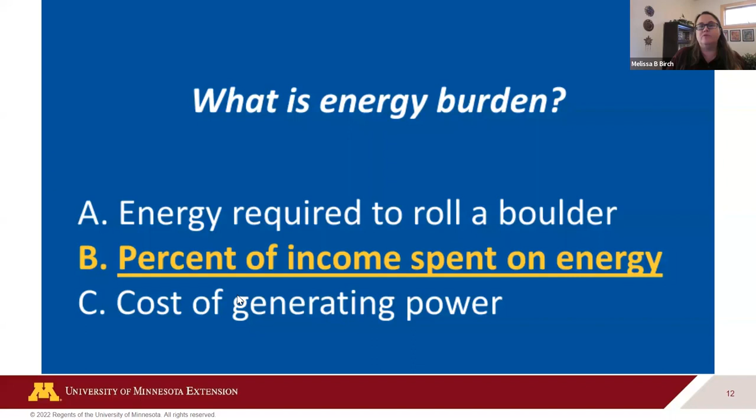I'm seeing lots and lots of B, and that is excellent because it is, in fact, the percent of household income that is spent on home energy bills. So the nation's average energy burden is about 3.5%. Minnesota's is about similar to that, but that's an average, right? For many Minnesota households, they may be spending 20 or 30% of their income on energy.

So we have at CERTs what we're calling the Under 5% campaign. The idea behind that is to reduce all Minnesota families' energy burden to under 5% of their income. And so that's where we get into those partnerships and working with communities to reduce energy burden. So there are a number of ways that we think about this.

One is getting assistance. So if you're someone who's like, gosh, my energy bills are just really more than I can handle right now, we're going to talk a little bit about some of the programs that are available to help deal with that. Or you may be thinking, how can I make my home more efficient, or work with my neighbors to help make their homes more efficient? We're going to dig into that in depth. And then at the end, we will talk a little bit about some of the tools and resources that we have available if you want to partner with us or work to end energy burden in your communities.

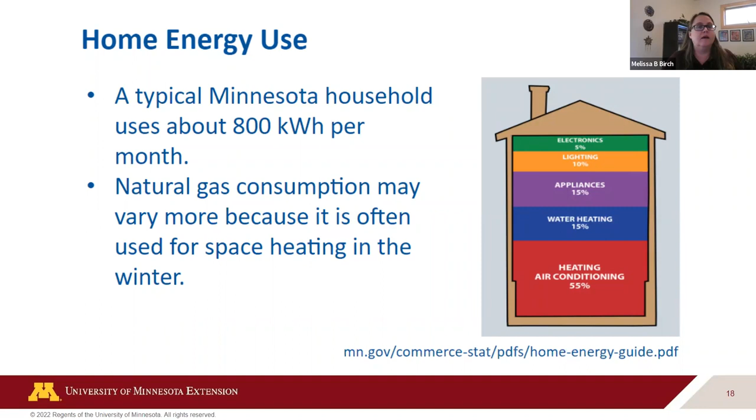Now, I'm not going to dig into that today, but we do have a series of home energy guides that provide more information about how to read that part of the utility bill and understand which parts of it you can affect and which parts of it you can't affect. So that's starting point number one for understanding your home's energy use.

One fun little exercise that I did with mine was to look at the spikes in my utility bills and figure out, okay, what was I doing that month that had it so high? You'll notice that first spike, our furnace happened to go out and it took a week or so to get someone in to fix it. It was in, I believe, March. So it was cold, so we heated with space heaters. We're going to talk about space heaters in a little bit, but one thing I want you to notice is they're really inefficient. They are not an efficient way to heat your home.

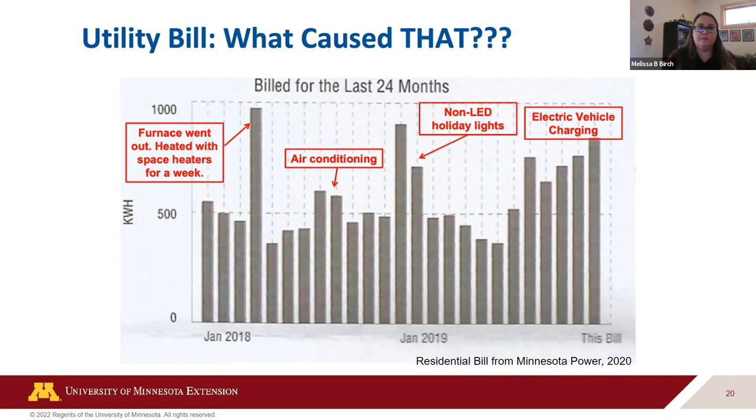So then I think I will hand it over to Alexis. Yeah, thanks, Melissa. As Melissa pointed out, over half of our home's energy use just comes from home heating and cooling. So this next section is going to really focus in on that, and particularly no cost and low cost measures or actions you can take. I'm going to talk about those first because why not? Let's start out with some easy things, right?

The recommended temp for setting your thermostat to during the day is about 68 degrees, because that's assuming if you're home, you're maybe a little more active, moving around during the day. You can go a little lower at night or when you're away, and that will help with savings, especially if you have a forced air furnace system or radiators.

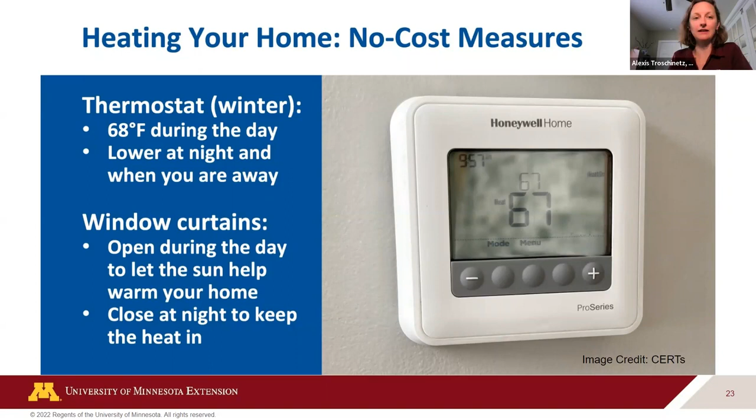There are thermostat options. So I was just talking about setting your thermostat to a temperature. If you have a manual thermostat, you can still manually go over and adjust it a couple times a day to keep at ideal temperatures for what you need. A programmable thermostat can take out some of that work for you, and you can program in certain days and times and even days of the week. And they have override settings for company's over, you're going on vacation.

And then there are smart thermostats, and these are typically Wi-Fi enabled, so you can access them through the internet, either maybe on a phone app or your computer. And some have an occupancy sensor and have a sense of when you're home or not, and they start with that information, adjusting the temperatures to meet your comfort needs when you're home, and dialing it back when you're not home.

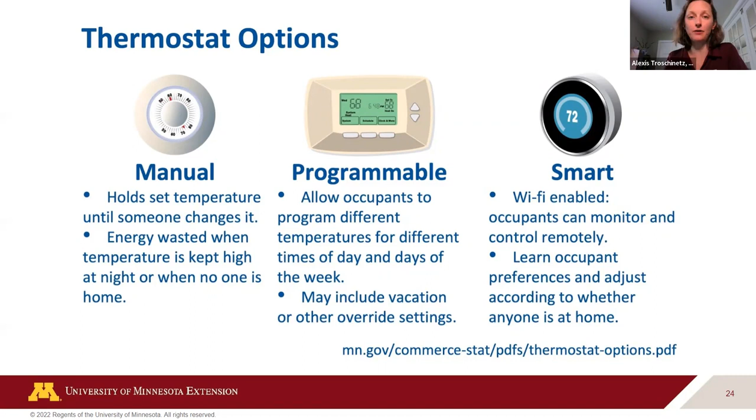Of course, anytime the furnace is running, you want to make sure all windows and doors are closed up. We don't want to be heating the outdoors in Minnesota. We've got enough to heat inside our own homes.

Also, several folks talked about their windows, and there are things you can do with existing windows and not have to pour a lot of money into new windows. You can add weather stripping if they've gotten a little loose in the frame to tighten up and close up any gaps. Weather stripping is kind of like a roll of foam that you can do with an adhesive. A real easy one is just absolutely making sure they're all closed and actually latched, because when they're locked closed, they're holding the tightest seal possible.

If you have storm windows and a single pane window, that's as good as having a double pane window. Make sure those storms are installed before winter and are all latched appropriately and they're closed.

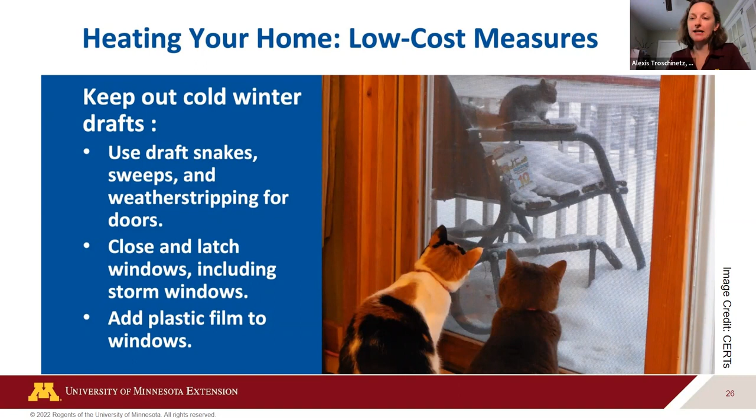If you're still having problems with leaky windows, there are these things called window films. You put some tape around the perimeter of the window, put this plastic on, and then use a hair dryer or similar tool to tighten up the plastic film, and you can still see right through it, and it just adds another layer of keeping the leaks out of your home.

For your heating system, for say forced air furnaces, either with propane or natural gas, you want to be changing that furnace filter monthly. It can save up to 15% on the heating portion of your bills by just keeping up with that filter and changing it out monthly so that it's not too clogged.

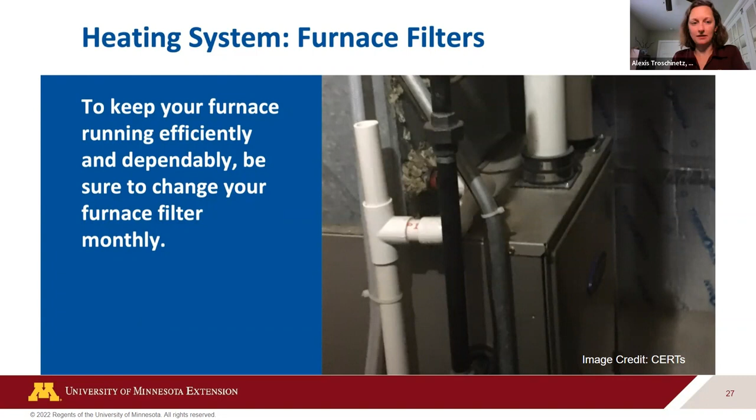But we do need that filter in place, not only for less dust in your house, but it is actually protecting the equipment in your furnace too. It's keeping dust from building up on your furnace fans and such. So that's a good, low cost tip that you could be doing.

Melissa mentioned space heaters being very expensive that she saw on her bill when her heating went out and she had to use space heaters. They are very expensive to operate. And in fact, they're a fire hazard. Nationally, space heaters are responsible for more than 20,000 home fires and over 300 deaths each year. So they're just not that safe.

And if you find that you are resorting to space heaters because your home is not able to stay warm enough with your full home heating system, and you're having a hard time keeping it at 68 degrees, definitely contact the Weatherization Assistance Program. They have tools and programs available to you to work at either weatherizing your home, getting it tightened up and insulated, or even looking at furnace replacement to make sure that you're getting the heating that you need in Minnesota without space heaters.

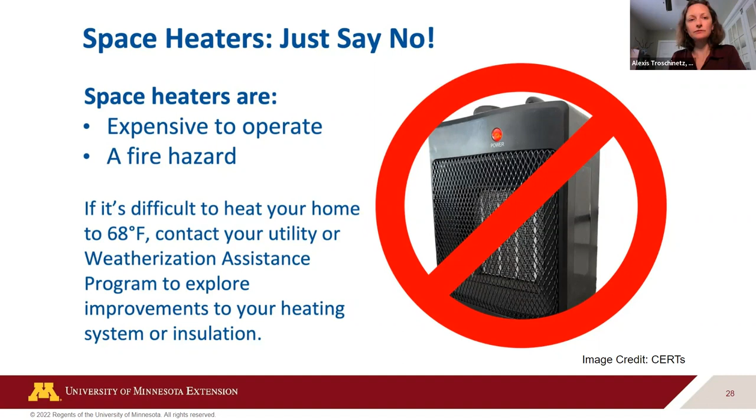Another option, if you're using space heaters, is to add additional heating with air source heat pumps. Air source heat pumps can provide heating in Minnesota's winters as well as air conditioning in our summers. They operate both ways, and they provide a nice steady comfort. They're going to contribute to lower energy bills. They can dehumidify in the summer. People who have these have raved about the quiet operation of them.

There are some really great utility rebates right now for air source heat pumps. It's kind of like the next big thing in home energy efficiency. We went through that wave of LED lighting, and now we're looking at getting some additional heating in our homes in Minnesota with these heat pumps. And they're very flexible. I'll explain how they can work with or without ductwork. And if you don't already have air conditioning, you could add air conditioning.

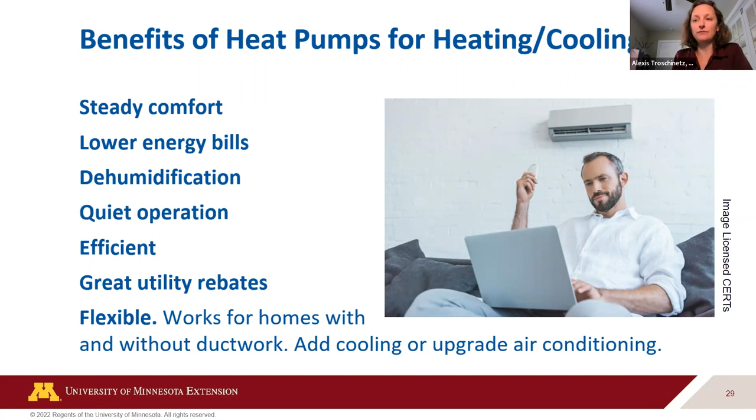And again, if you're using a space heater in only 1 or 2 rooms, heat pumps are flexible in that you can add just some heat to 1 or 2 rooms, depending on the configuration. They work just like an air conditioner. They're the same exact equipment as an air conditioner, but able to operate in reverse and bring the heat value from outdoor air, even in our cold winters, into the home and provide heat. So they're efficiently heating and cooling with electricity only. They're not burning propane or natural gas to make this work.

And they provide up to 3 times more heat energy than the amount of electricity being put into it through physics, compression, expansion, and using a refrigerant to hold that heat and bringing it from the outdoors into the home. So that is a little bit about how they work.

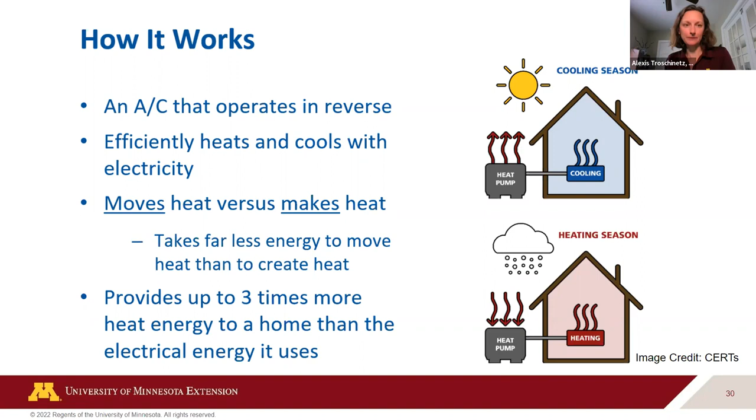Why would we think about heat pumps for heating in Minnesota? Well, out of our heating and cooling needs, we have about 2,000 hours that our furnace is running in the winter to provide the heating we need to keep our homes comfortable. But we only have about 300 hours of cooling. So the choices that we make for heating are really important.

And they actually make complete economic sense today in homes that are heating with propane or already heating with electric resistance heat, like electric baseboard heaters, because both of those forms of heating are very expensive. On the right, you can see the annual cost savings. If you already heat with electricity only, like electric baseboard heat, you could see around 55% savings on your heating bills by switching to a cold climate air source heat pump. And with propane, you might see around 30% savings.

And that can vary because, as those of us on propane know, the price of propane fluctuates quite a bit year over year. And even within a winter, sometimes there are spikes in that price.

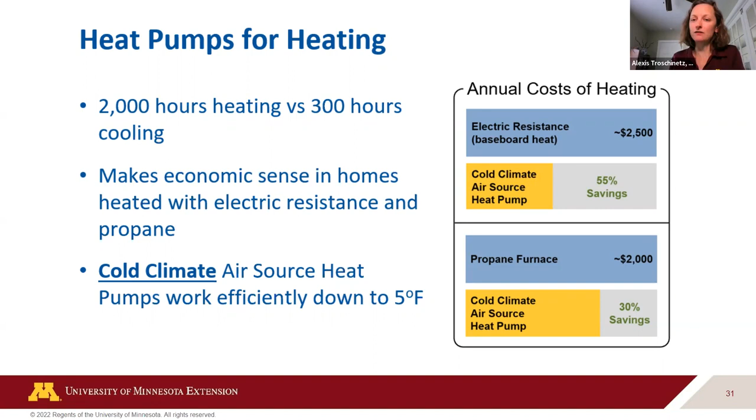And how do we make sure that these heat pumps work in Minnesota in our very cold winters? We ask the contractor for a cold climate air source heat pump, and cold climate air source heat pumps can work efficiently down to 5 degrees Fahrenheit. At that point you would turn to your supplemental heating, likely your existing heating system, like your forced air furnace or electric baseboard heat, to make up the difference on those few days or few weeks of very cold weather.

And there's just a couple basic setup options for air source heat pumps. The one on the left you may have heard of, it's called ductless or mini split. And you've got this outdoor unit installed on the outside of your house. And then you have maybe one of those, or if you are trying to do your whole home, you might have 2 of the outdoor units. And then you'd have multiple of the indoor units. And a lot of times folks put the indoor units in their living room, the bedrooms, places where you're going to really want that comfort throughout the day and night.

And those indoor units tie into the outdoor unit with a line set, it's called. It looks like a rain gutter on the outside of your house, connecting the two. And that works great if you don't have ductwork too. You can use it if you have ductwork, if you want to add heat in certain places, or if you just don't have ductwork at all, you have radiators or baseboard electric heat. The ductless or mini split is great.

The one on the right is the central or ducted version. And this thing looks just like your regular old air conditioning unit. And in fact, that's what it is, but it just is able to operate in reverse and offer heating as well. And that heat value gets pulled into the home and added to the ductwork, just like it would for air conditioning. And your furnace's air handler moves that heat through your home. So that's a little bit about air source heat pumps and how they work in Minnesota.

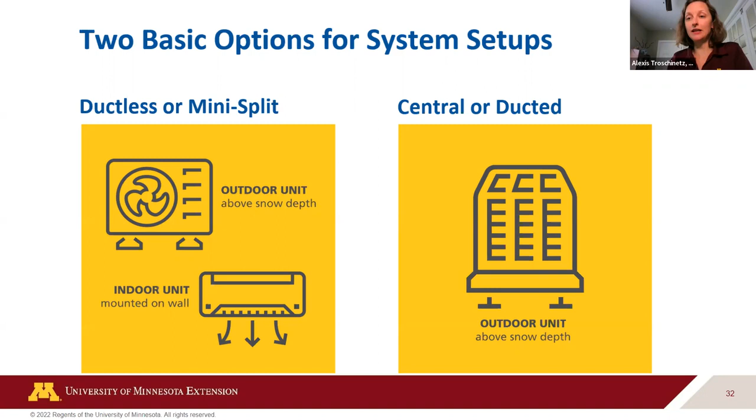And anytime we're thinking about a big heating or cooling change like this for our home, we want to think about the home as a whole too, the structure of the home. And this is where we talk about weatherization. And there's two parts of that. There's air sealing and there's insulation. Air sealing is trying to plug up all those little holes that are creating leaks and drafts and bringing cold air in the winter. We seal up those leaks using caulk or spray foam, materials like that.

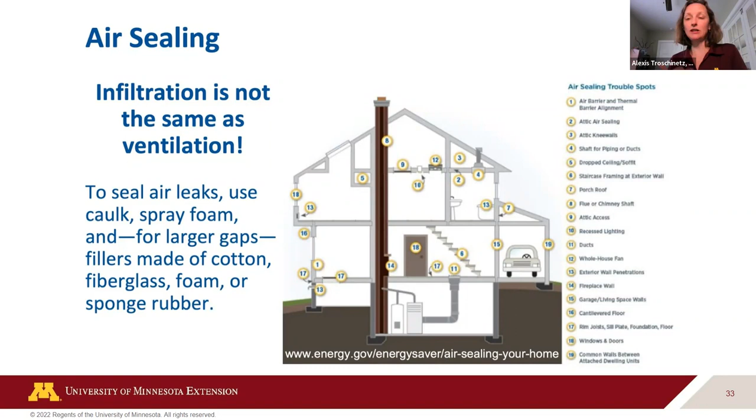And the graphic on this slide is showing the variety of places that the leaks can show up. As our houses get old and settle, little cracks form here and there, around chimneys, around bath fans or lights going up into our attic spaces. Those can have leaks, joints with the foundation. All of these locations over time can just get a little leaky. So even if your home's not too old, you could be looking into this and finding some savings here.

And then there's insulation. That's the other part. So I like to talk about it like a winter coat. If you've got a broken zipper and your zipper has a little opening on your winter coat, you kind of want to get that zipper fixed, right? That's air sealing, fixing that up. Insulation is like, ooh, maybe I got to switch over from my fall coat to my heavy winter coat. And the R value is what we look at for insulation. The higher the R value, the better, the more insulation it's going to provide.

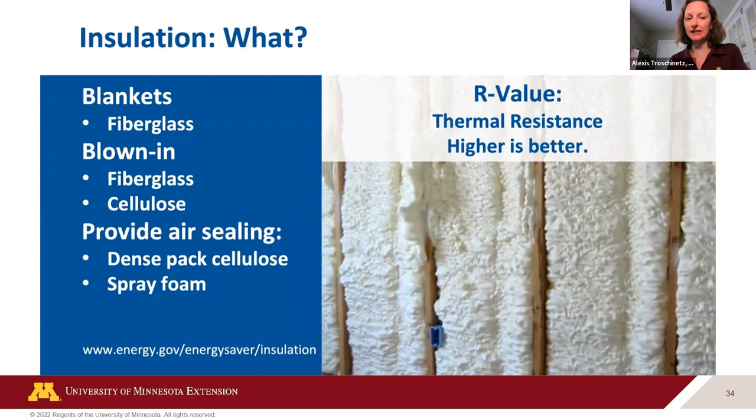And in Minnesota, in our attics, we want about an R50, which is almost 20 inches of fiberglass batt insulation. So if you think you have less than 20 inches in your attic, that would be a really good place to start and do something before winter comes along. But insulation comes in all these forms, fiberglass batts, blown in cellulose, spray foam, like what's pictured here.

And as Melissa mentioned, the two runner-ups to heating and cooling are appliances and water heating. So I just wanted to touch on that a little bit for saving energy in your homes. So we have another opportunity in the chat to answer A, B, or C. When you're going to buy new products out there, light bulbs, appliances, which label lets you know if it's an energy efficient product? Is that going to be Energy Saver, EPA approved, or Energy Star? A, B, or C? We've got folks putting in some C's, a couple B's.

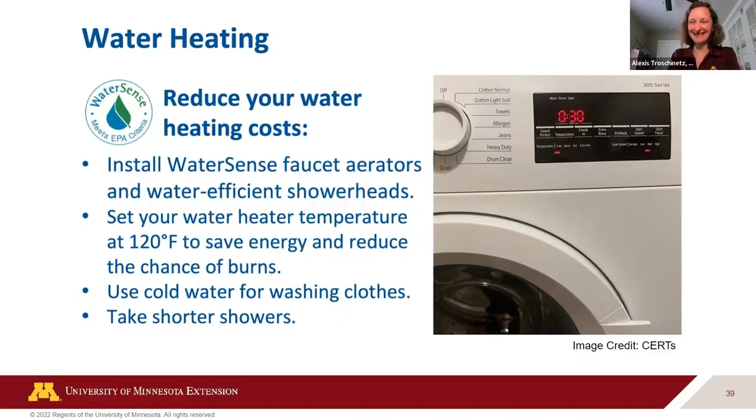Surprisingly, you can actually get really good clean clothes washing with cold water. A lot of our clothes actually wear better over time washing with cold water, and you've got the energy savings there as well. So play around with that, see which loads you can get away with doing with cold water. Both on the washing machine and the dishwasher, run full loads. Make sure you're using the equipment's full capabilities every time you run it. And you can, of course, take shorter showers. Back to Melissa.

Thanks so much. So we were at the state fair in the Eco Experience building earlier this month and in August. And one of the questions that we got a ton was, what if I want to make my own power? What if I'm interested in solar? We're not going to dig really deep into that, but I did want to give some starter questions. If you're thinking about solar, what are the first things you want to think about? The first one is, do you have a good unshaded south-facing roof or good southern ground exposure? Because if you've got beautiful trees all around your house, trees are wonderful, but not terribly compatible with solar. So that's really question number one.

If you're interested in a roof mounted system, is your roof newish? So within the last few years, has your roof been replaced? The reason for that is that solar panels last a really long time, 25, 30 years. So what you don't want to do is install it on an old roof and then have to uninstall it completely to re-roof your house and then reinstall it. So you want to make sure that you have a newish roof if you're thinking about solar.